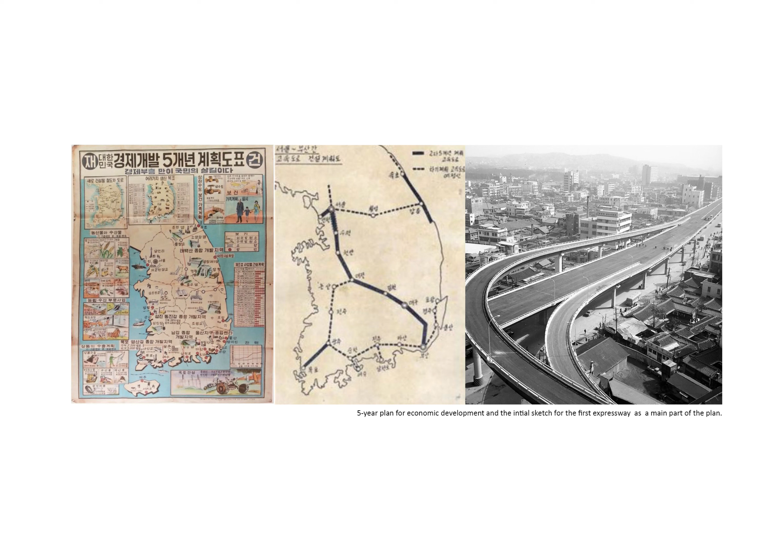Camping traces back to Seseok, the first camping infrastructure in the late 1960s. With a series of 5-year plans for economic development, nationwide road construction, and the emergence of the tour bus, people were enabled to temporarily get away from the city.

Plus, advertisement of camping as an ideal leisure activity promoted camping as a counterbalance to people's urban lives. People in cities could go to national parks or other holiday spots and camp over the weekend in a family unit or for a company outing.

However, there was no infrastructure for camping at the time, so campgrounds were made by visitors' own creation. Seseok epitomized the emerging trend of camping of the period.

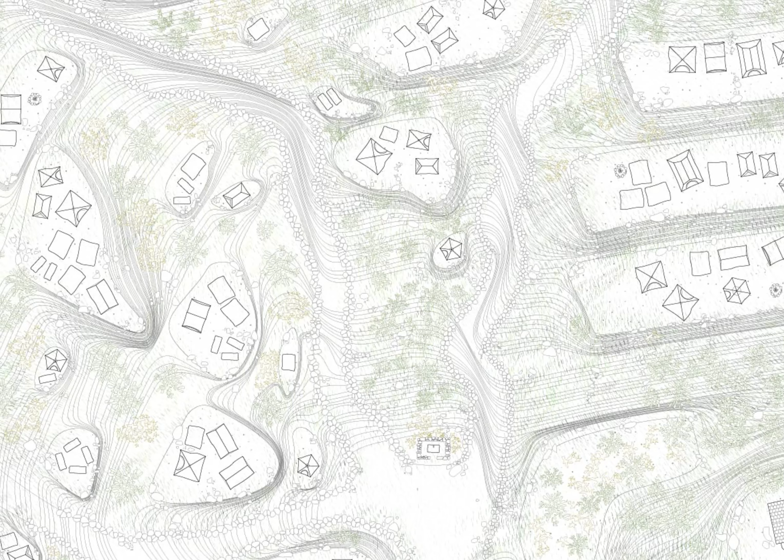People leveled the ground by themselves to set up their tents and eat. It started from small scale, then developed into terrace grounds. Trails were made or extended from existing paths. Toilets were already provided, but later people made their own communal facilities such as cooking areas or incinerators.

However, around the 1990s, camping was restricted only to designated areas under the pretext of protecting nature from camping. It changed the image of camping into auto camping, along with a boost in car sales.

Auto camping is a mixed word of automobile and camping, meaning camping utilizing a camping car. In Korea, the auto campground was shaped into an enclosed flat field with basic infrastructure such as toilet, shower, or sink, without any spatial organization.

This camping trend changed again in the 2000s, along with increased leisure time through the introduction of the 5-day work week, rising awareness of well-being, heated urbanization, and desire to return to nature.

These resulted in the emergence of the planned campground, especially in Seoul, the capital of Korea. Campgrounds in this period have clear demarcation, diverse types of ground treatment and landscape, and are furnished with many infrastructures and camping equipment for accessibility.

Continuously increasing demand for camping brings about campgrounds being diverse and competitive. Campgrounds infiltrate into golf courses, saunas are facilitated in campgrounds, and school buildings are renovated into campgrounds for families.

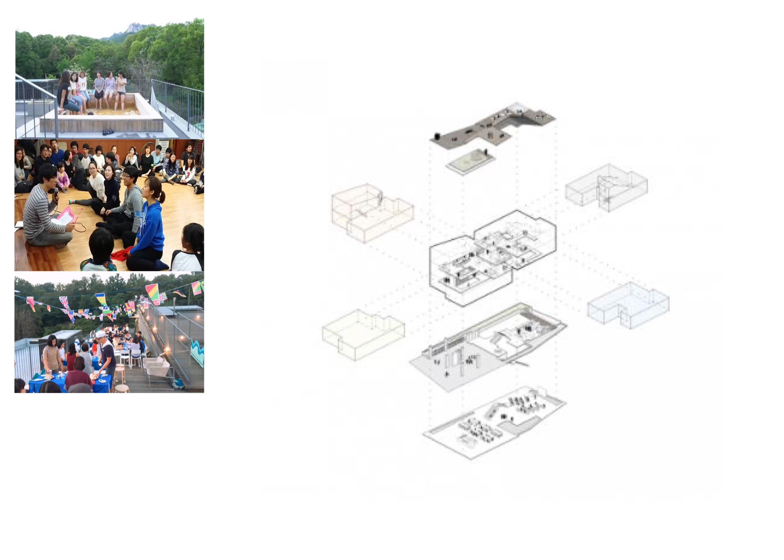Eunhae community is a co-living house for 47 people who split into 4 different tribes. The tenants have experimented with living together for 10 years and have been involved in creating the house.

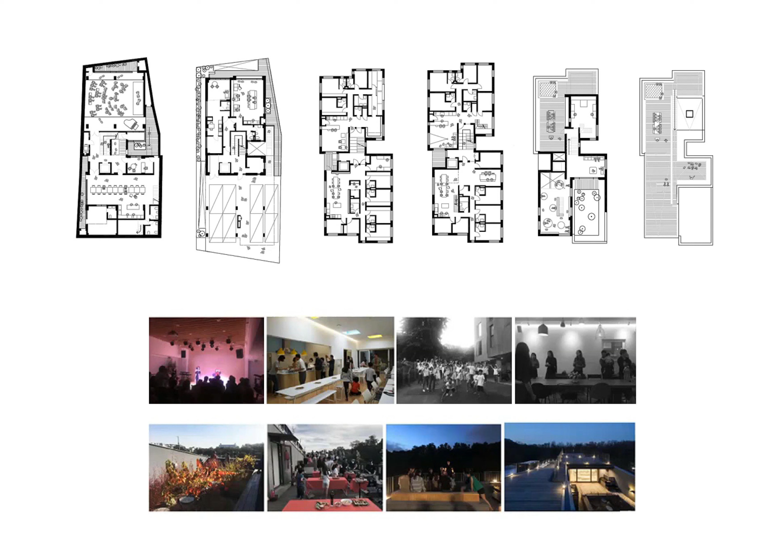Boundaries are ambiguous and the composition between tribes is flexible. With this ambiguity and flexibility, they can extract their own spaces in anti-typological forms.

For example, the dining room for 47 people is utilized as an alternative school, and a communal hall is used for a music studio and as a gathering space for discussing the management of funds they made.

These configurations are made through experimenting with different activities at a variety of scales in generic spaces. Even in cities, new buildings are being designed by larger groups of people who want to find their own ways of inhabitation out of the rigid structures of typologies, culture, and living forms.

And campgrounds nowadays are being used as a platform where people can experiment with their own living typology through different activities at an unusual scale that is not easy to realize in the city, even though existing campgrounds remain typological and prescriptive.

Hijacking the tendency of existing campgrounds, flat house is a new type of campground that encourages people to experiment with their everyday living forms in diverse scales and unfold a new architectural typology in open field.

The area is a thoroughly planned district where underdeveloped residential areas on the north are being demolished and newly developed. In the middle, a business zone is located, and on the south, near the river, there are campgrounds, parks, and stadiums. Contrasting with its seemingly balanced mechanism segregating areas for sleep, work, and leisure, flat house is meant to exacerbate the experimental movement out of the containment of a city.

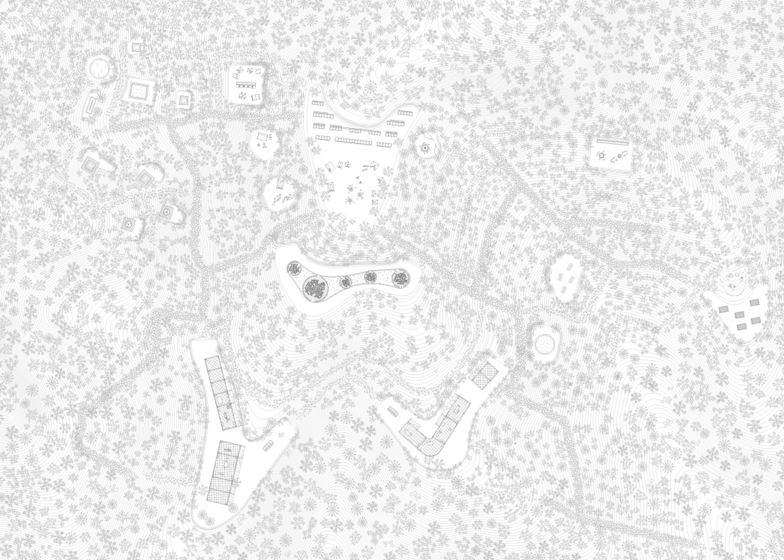If they want to leave, they can hand over their ownership to others on the waiting list. This means at the beginning, flat house will only be facilitated with permanent structures with fixed functions such as workshops, sauna, and communal showers and toilets.

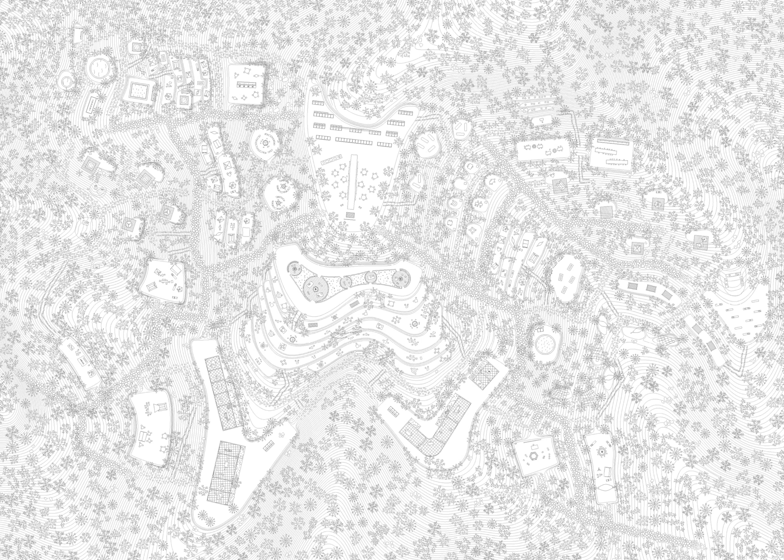Services like electricity, water, and internet are distributed throughout the site, and people can settle on a ready level of ground, or they can flatten grounds by themselves according to the location and size they want to design.

As this campground motivates people to create their living form and opens up possibilities, the focal point of this project as an architect is to create an inhabitable platform by modifying ground, as the etymology of camp indicates: level the ground in open field.

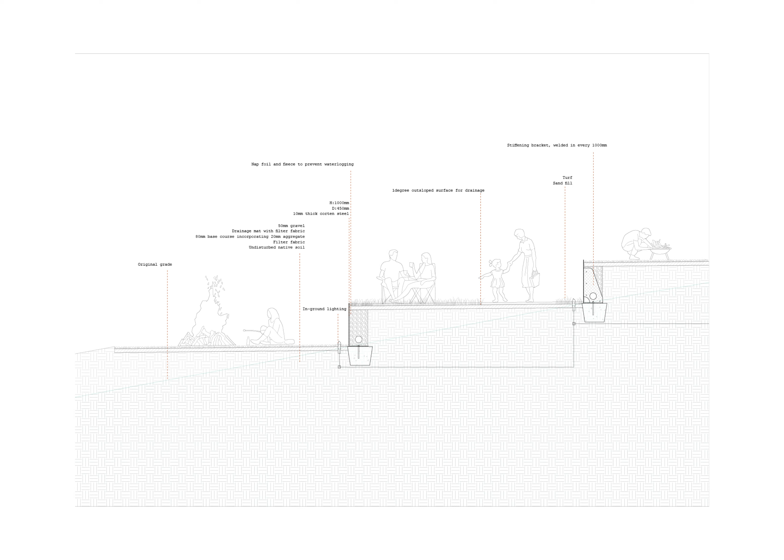Thus, I collected a set of techniques for flattening and stabilizing ground and of services, such as in-ground outlet, light, or water. And how is the campground organized?

Flat house consists of 2 communal spaces with permanent structures, and the rest is open ground with a minimum amount of facility that the agency is required to build, such as a large communal sink, a bathtub for 10 people, or an in-ground cave for forest bath.

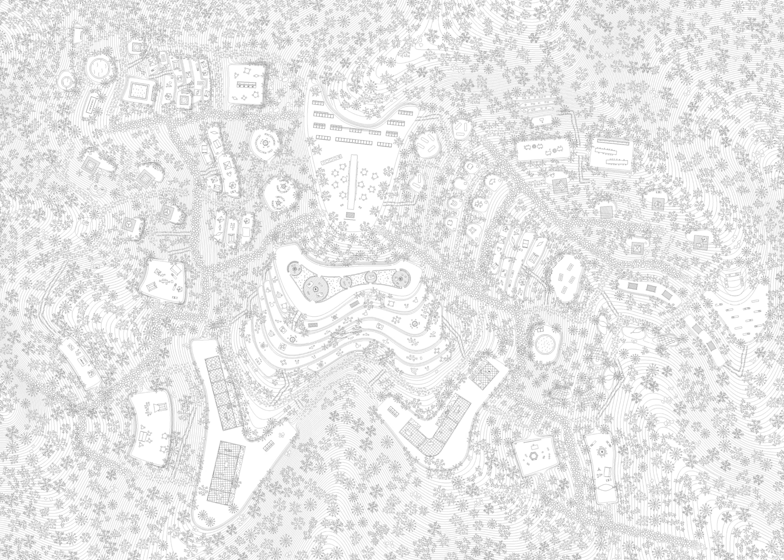As for the communal space, on the lowest level there are 2 workshops to produce something for their living space or group activity. As you go up, there is a sauna where people can burn wood to make charcoal, and with the remaining heat they can barbecue, sauna, and sleep. Above the sauna there is the widest flattened ground where a series of showers or toilets are facilitated.

As flat house provides an environment for user-oriented activity at different scales, the rest of the flat house is categorized into 5 different spaces: space for work, cook and dine, sleep, bath, and forest bath.

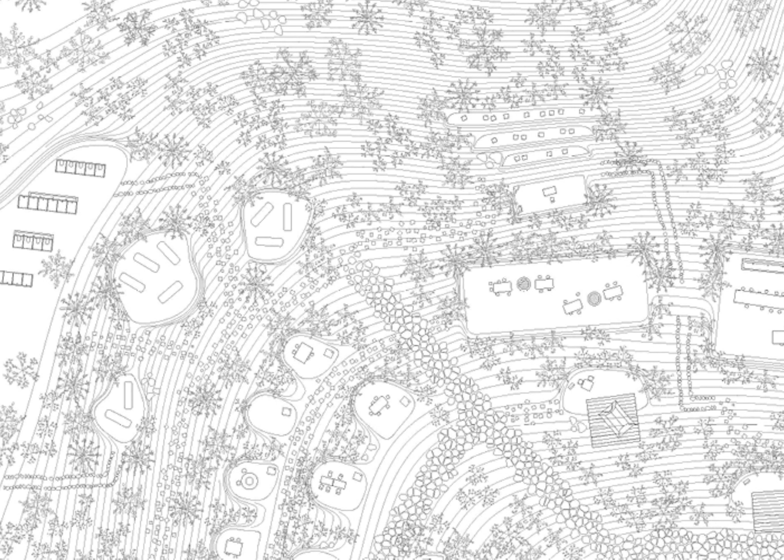First of all, space for work can be an open area but with trees planted in green giving soft demarcation, or it can be a private desk on a terraced ground, or can add a more private moment with more densely planted trees or rock chairs.

Space for cook and dine: worktop or sink can be facilitated using modified topography, and the form and size will vary depending on the group members.

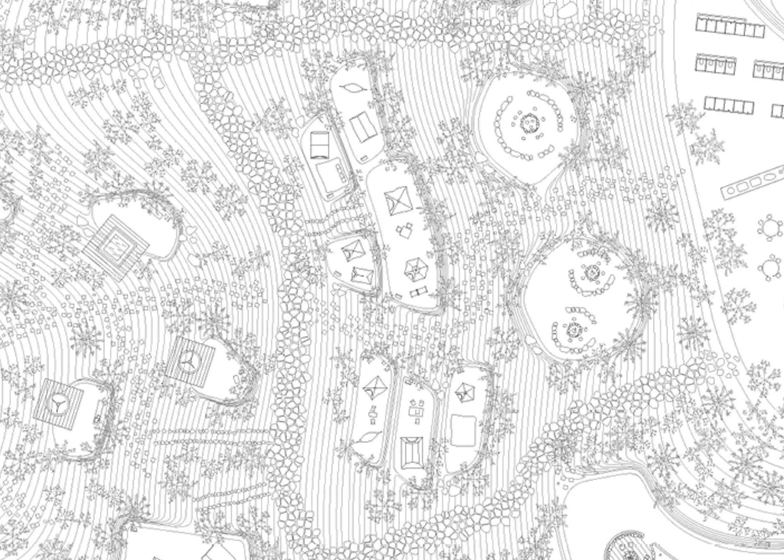Space for sleep can be collective or individual. Tents can be set up for a nuclear family, while other social groups prefer to share one giant sleeping deck.

And the next is space for bath. That is a ready shower facility in a communal area. Bath in this context is more of collective use, but in different sizes and uses.

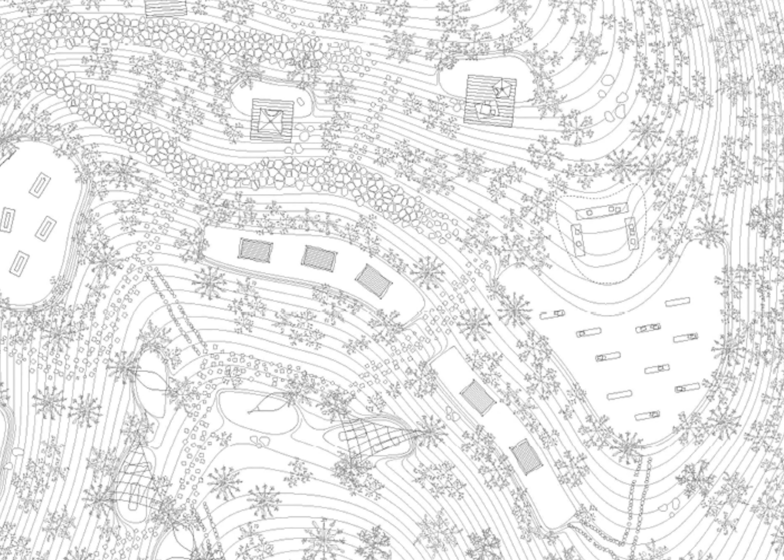The last is space for forest bath. Forest bath is more of a therapy by immersing yourself in nature, such as walking on mud or meditating.

Rather than designating a specific program, the aim is to provide an inhabitable environment in various scales and forms that gives more possibility for people to keep experimenting and sorting out their forms of living and social relationships.

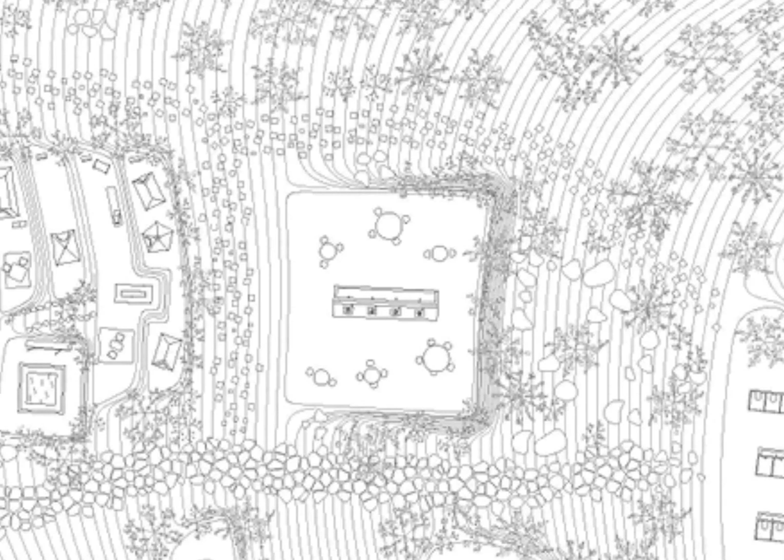In case of dining, you can choose to cook and share food with others in a largely cut area with an in-ground socket on a gravel floor, or there must be someone who prefers more private dining time in niches surrounded by vegetations. You can share your sink and kitchen utensils for preparing food with others, while sleeping in a more private area occupying one floating deck.

Individual water pipes are distributed across the site.

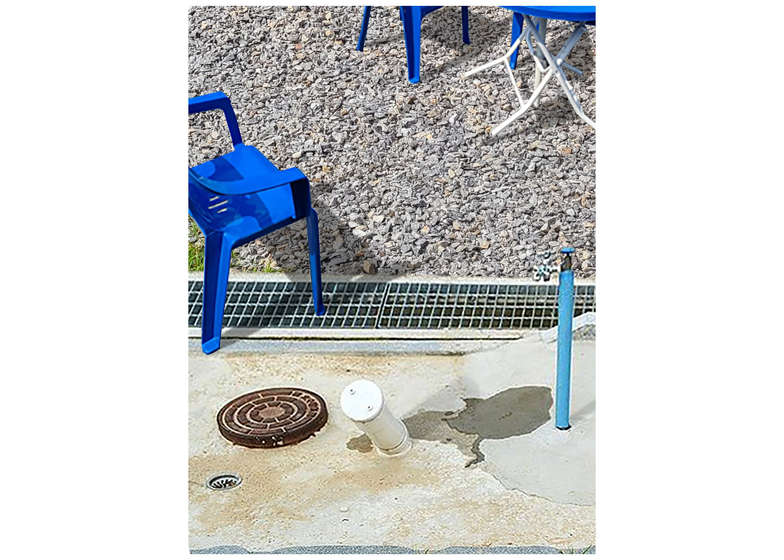It can be changed into a forest bathing space. You can walk with your bare feet and wash them out afterward.

Space for bath on terraced ground can be mixed with sleeping area but with green boundaries to have some privacy.

Flat house, amplifying the experimental movement already happening in cities and existing campgrounds, is meant to encourage people to make their own living typology and social relationships. Thank you.